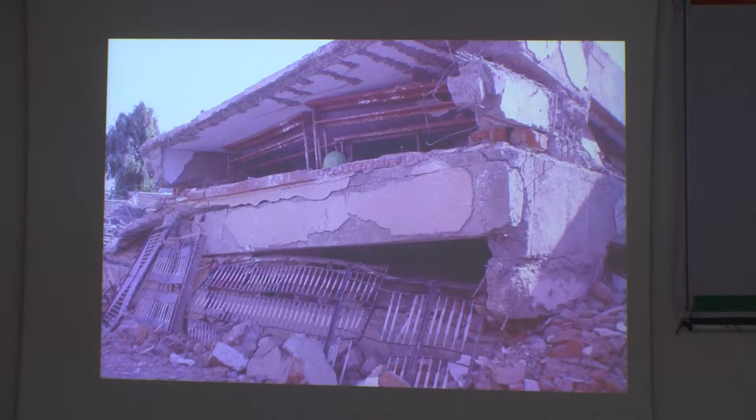So today I'm going back to Shanti Niketan. I want to send my children to Shanti Niketan. Under the trees I want them to learn, even if it is raining, because I don't trust these damn buildings anymore. I don't trust them.

Because some of our own brethren who are in the architecture and engineering community have not been doing their job right. They have not been doing their job right, and that is exactly what is worrying us most, that ethical standards have really dwindled down, and the starting slide that we saw today made a huge difference for us, because at the end of the day, when you go out of this room, the onus is actually on you and not on anybody else.

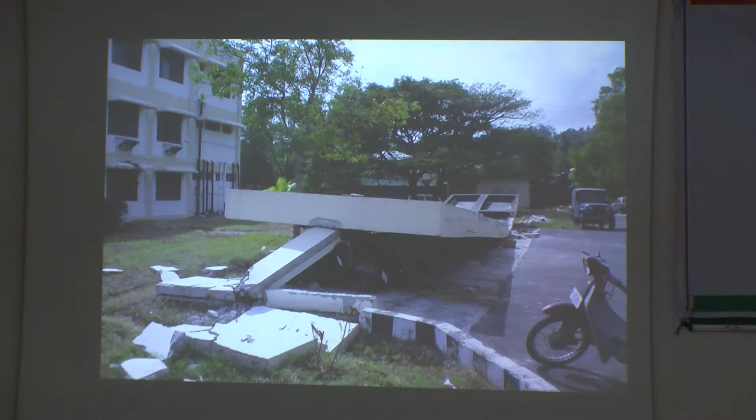The summary of what I would like to say is that today India does not have capacity to design even a cycle stand to withstand earthquakes. This is a cycle stand. Right? Cycle stand in Chopra Saab's book is the vertical, single vertical column. You can't get a structure cheaper than that in terms of structural elements.

That's the lowest. Of course, if you ask Saint Gobain, now Saint Gobain is building without any verticals, only horizontals are going to be there in Saint Gobain's new building that they have come up with a wonderful picture of. No verticals, only horizontals. Very interesting. They'll hang in the air. Newton's law will be applied floor-wise. Weights will just stop there. New gravities will begin.

The major concern is quality and safety. Two items that have been lost somewhere en route from college to practice. We have lost these two items on the way. When you reach home, your mother says, "Where is it that you put it in your pocket?" and you say, "I don't know what happened, but I lost those two, quality and safety."

Both in self-built houses and in contractor-driven houses, and the images you saw tell you that it's a deep problem. What is difficult is that the owners, who are typically non-technical, cannot make sure that a building actually has safety. The owners cannot make sure. They trust. When you sleep on the train at night, when you go from Hyderabad to Visakhapatnam, you have to cross so many bridges, especially the Godavari bridge. You trust the damn engineer that he has done the bridge right, otherwise you won't sleep.

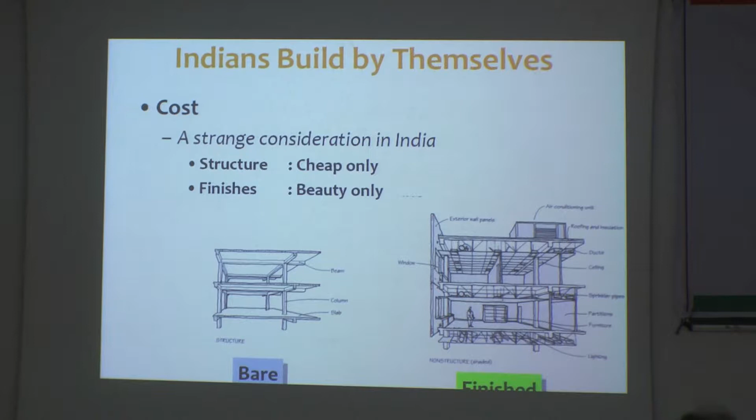The left hand side picture is what the engineer gives, and the right hand side picture is what the architect does to it. Let's take a closer look at that. The engineer gives you the left hand side picture, and the right hand side picture is what the architect is doing. Everything you want, false ceilings to finishes to furniture to equipment, everything.

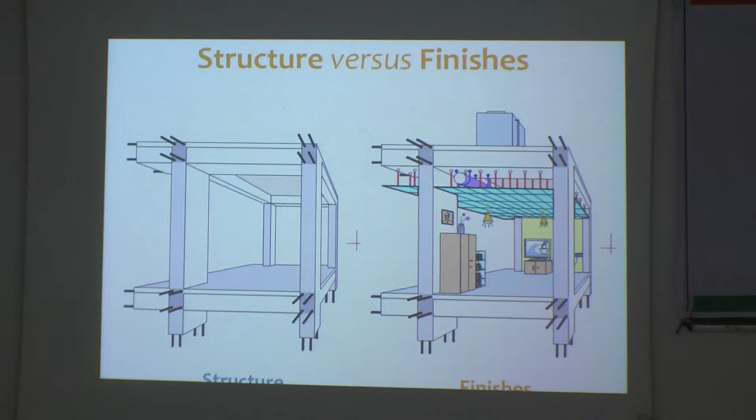And in recent times, you see a much varied version of this, which tells you that I want to make an extra buck, so I say, Airtel, please come put an antenna on top of my house and give me 3,000 rupees or 5,000 rupees every month, and that is what you're doing. An antenna is being put without ensuring that the building is actually going to be safe with the antenna on top of it. And many houses will not be able to withstand that.

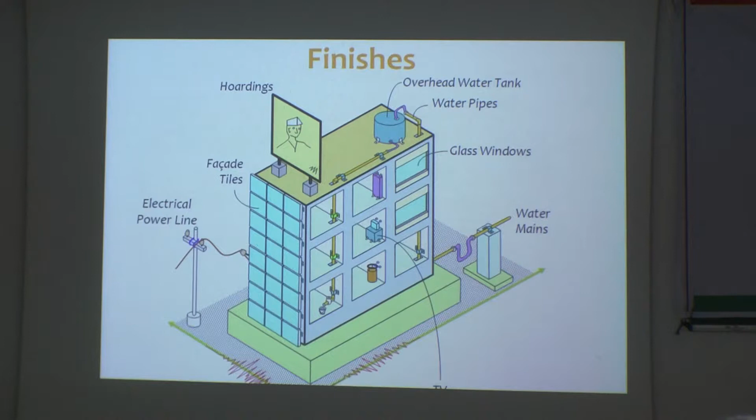And recently you saw one in Secunderabad just falling down because somebody put a ton of bricks on it to make halim on it, right? Yeah, it's embarrassing. You can't keep changing the functionality of the structure after it is built and approved by a municipality, then you're responsible for it.

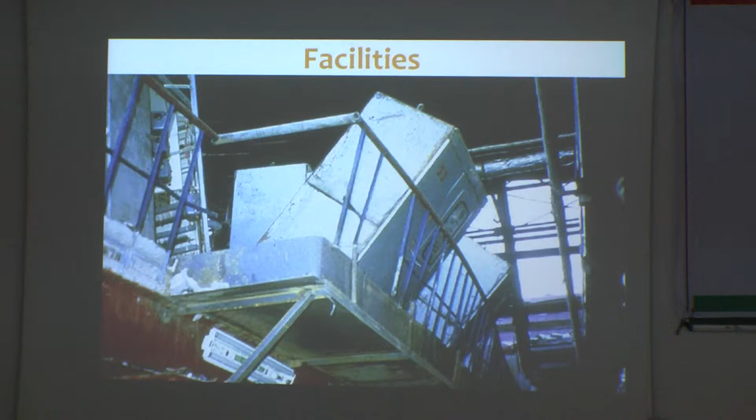Looks. That's the only thing left in this world. There are three things that the people of India like: beauty, beauty and beauty. That's the finishes, the facilities that you're talking about, and then the furnishings. All of them will be in trouble if your structure is not safe.

What is interesting is, I remember when we were looking at the India-Pakistan war that was going on, in our house we didn't have any color on the walls, possibly not even plaster. We were just about getting out from a lantern to a first light coming in, and then we had one switch and one fan on the top. That was the finish in the house. And today you have a whole load of them.

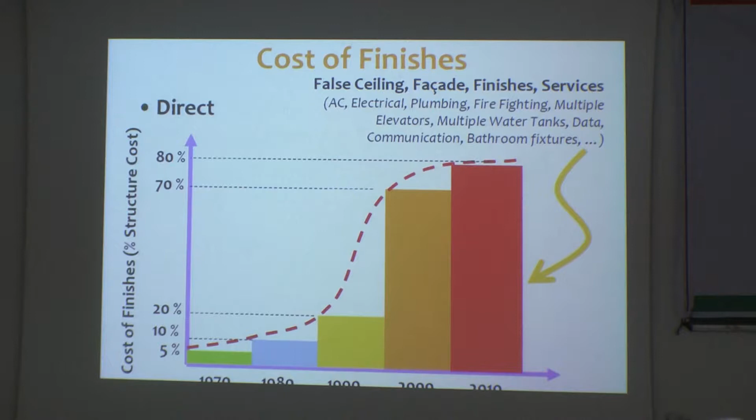And if you look at the cost, at that time the electrical work and all the finishes in the house was only about 5% of the total project cost. Today the tables are turned. We're talking almost 80 to 85% of the cost going to the finishings and fittings. So 15% of the cost is actually your structure, and you're skimping on that to make some savings, but you're not willing to sacrifice on your Jaquar faucets and plastic emulsion finishes on the walls. So somewhere we have misinformed the owners across the country about what is okay and what is not okay.

Now, typically, you're seeing 1.27 billion divided by 305 or 250 million houses. So 4 to 4.5 is the calculation. So everything looks okay; there's no shortage of housing. But there are a lot of rich people who own 3, 4, 5 houses, and so there are a lot of poor people who don't have any houses. The point to remember is, if you are getting more than one property in your name, you're actually getting somebody out of their house. Unless you have added 2, 3 houses for them, don't get one more for yourself.

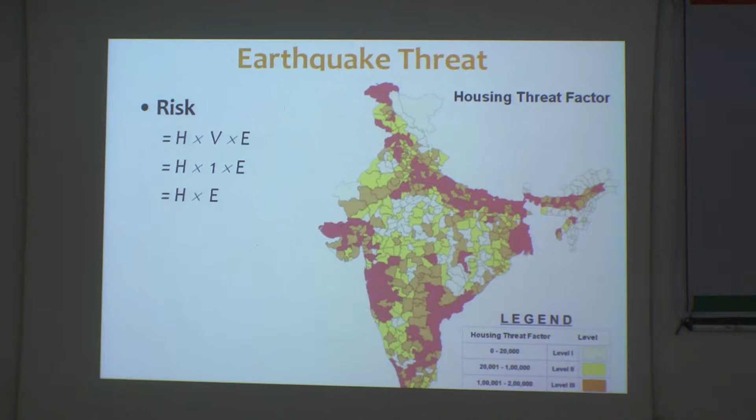The others are not free from this threat. This is the current understanding of hazard, the current threat picture; as the hazard picture changes, you will get a new threat perception. In the early 1900s, the world had loss of life and property, and so did India. Today, countries that took life as a priority have very little loss of life. Even if one person dies, they go crazy and want to get to the root of why that person had to die in a structural collapse.

But that's not the story in India. We just give ex gratia. Only the amount of ex gratia has been going up since my childhood. I remember something like 5,000 those days, and now it is 10, 15, 20 lakhs. The number is only going up. It's not made any difference to the nation.

States in India can be classified: first, those who know what to do and are doing it. Second, those who know what to do but do not do it. That's called willful misconduct, and these are the most dangerous states. And the third set don't know what to do and don't do anything about it. That is ignorance is bliss. But the middle one is actually the trouble for us.

What is important to note today is that every death in every house is avoidable. Only when engineers are accountable for safety can it be avoided. If engineers are not accountable for safety, they will never have this threat or pressure on them. And India needs to wake up its engineers and architects.

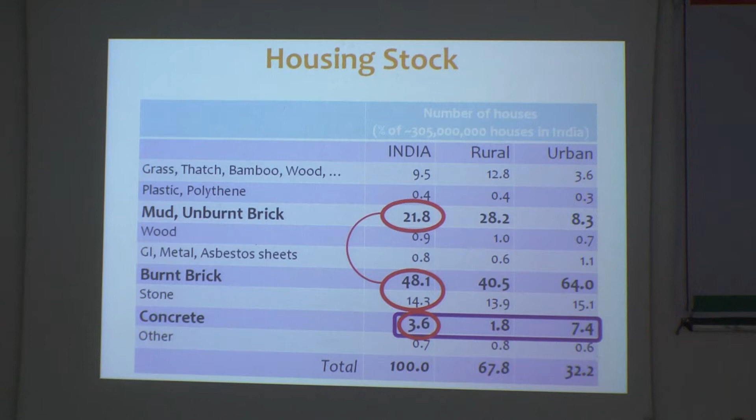And what did we do in the colleges? We left masonry to masons. No civil engineering program has masonry in it. Building construction as a course has little one line saying masonry, and that's it. Today, the number of faculty members who can teach masonry from the heart will be on the fingertips, 3, 4, 5 in this country. We have left it to the vultures. We have abandoned. The person who's supposed to throw light on the society has abandoned this responsibility. So this is not acceptable.

At the same time, reinforced concrete, even steel structures are not taught in the so-called urban curriculum that we have. Even steel structures are not taught properly. The number of faculty members who can teach steel again is on fingertips, again from the heart, not from the book. Vazirani, Ratwani, Punmia, Ramamrutham, Kanetkar, you know those books? 1 paragraph of theory, 40 pages of problems.

That one paragraph has a formula and 5 variables. In the remaining 40 pages, 4 variables are given, 1 variable has to be obtained. I mean, this is like disrespect of intellect on 40 pages. But we are doing it. We have abandoned steel, we have abandoned concrete, masonry. Only thing that's left is concrete here. Very unfortunate curriculum in civil engineering today. Architects are little better. They spend at least 2-3 weeks drawing English bond, Flemish bond and all that.

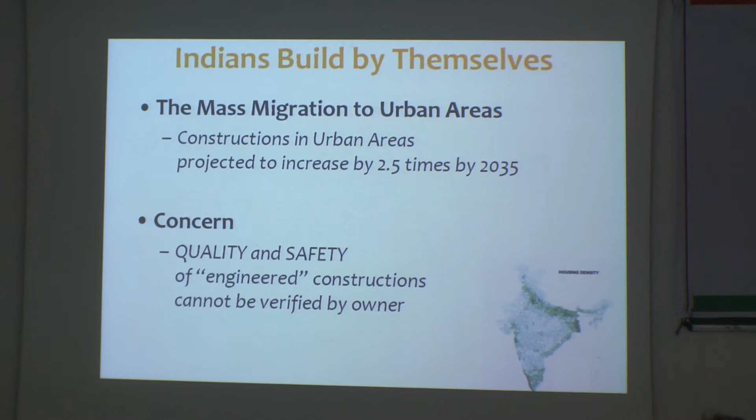The expectation is in the next 5 years, in this 12th five-year plan, we're going to spend 85 lakh crores. Those of you who don't know 85 lakh crores, 85 followed by 5 zeros, followed by 7 zeros. That is the number of rupees it has. So India is not a poor country, if anybody thought India is a poor country. Half of this money will be spent by civil engineers, 1/4 of this money by electrical and mechanical engineers, and the rest of the country will keep the remaining 1/4.

So this 25 million houses that we have to build, let's look at housing alone. For that we are spending 5,000 crores, let me say, in this next 5 years or 4 years left. And he's saying it's time up for me to go.

Every lady passing on the street is not your bride, and vice versa. Only one is determined for you, and that will come at the right time. Don't be in any hurry also. Don't waste your time in colleges. It will happen at the right time. Everything is determined.

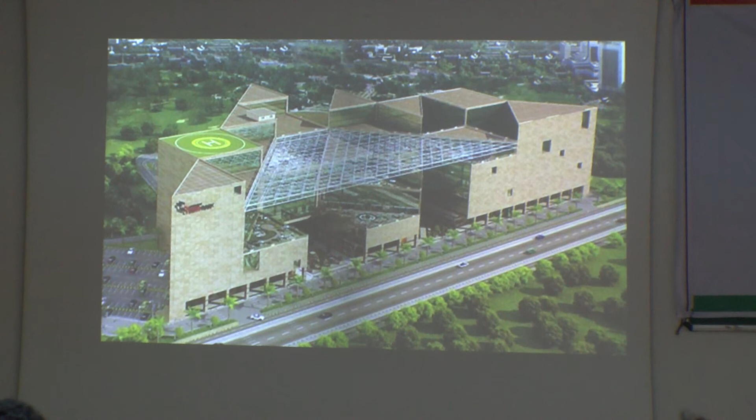This is another fellow who said, okay, sun is on this side, blank, no windows. Very good. What did he do in the ground storey? Take a look at the ground storey, open ground storey, with a helipad on the top. Quickest way to, right?

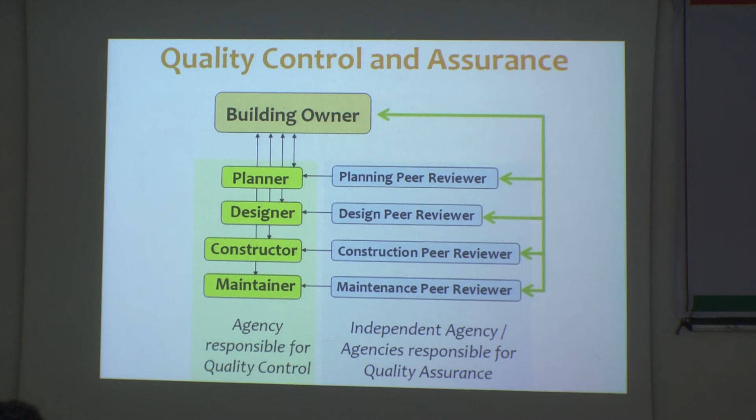What has happened is, I am designing a building, nobody is checking my design in this country. I am constructing a building, nobody is examining whether I am constructing properly. I am analyzing a structure, nobody is verifying my analysis. I am going scot-free. What it means is, even if I have got the best degree from any college and I have got good quality control in myself, nobody is assuring quality. Nobody is looking over my shoulder to make sure that I am doing good quality work. No quality assurance.

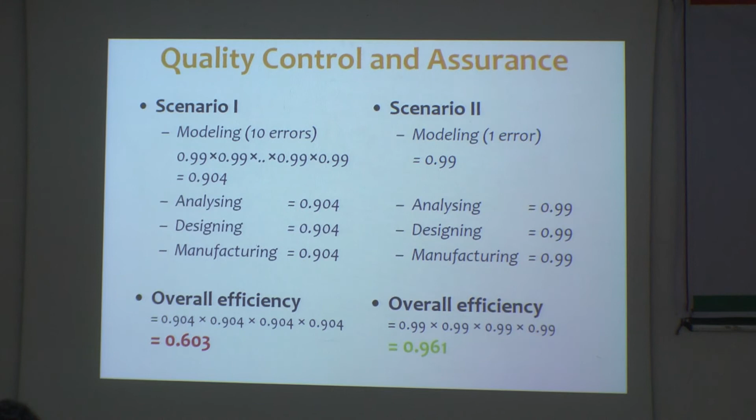Take a look at this example. If there are 10 steps in each of the 4 activities of modeling, analysis, design and construction, then even if I make one mistake, 99% efficient, in 10 steps I get 90% efficiency. In 4 of these acts, I will get 60% efficiency. But if I have a quality assurance company sitting on my head, I will make only 1 error instead of 10 errors, then my efficiency is 96%. Believe me, quality assurance is a very powerful activity if you take it seriously. You need to have quality assurance in building and housing safety.

Otherwise, you want to see pictures? More and more pictures. We will collect as many pictures as you want, and then you can keep wondering about it. And your curve is going to go steeper and steeper to the left. The life of the structure is going to come down faster and faster. And this is the truth of today's reinforced concrete construction. IIT Kanpur is built with reinforced concrete structures from 1960, they're still standing. But 15-year-old reinforced concrete structures are all corroded. This is the modern reinforced concrete that we are building. Not a good situation at academic or even professional level.

I think the finishing instinct, the last lap, we are not running properly. And we are always looking at somebody from the West coming like Santa Claus, giving gifts to us and going away. All the time. We are not trusting ourselves. So my question is, how long will you keep appreciating their excellence in product development, an outstanding stadium, great lighting work, or an excellent car and all that, and then abandon India?

This is what troubles me most: why is it that our roads are like that? Why is it we can't build our country? We need to look within. We need to understand this one word which that old man said and died: self-reliance. Okay, 67 years ago he said it, but still we are not understanding what he said. Self-reliance is the mantra for us, but it's not happening yet.

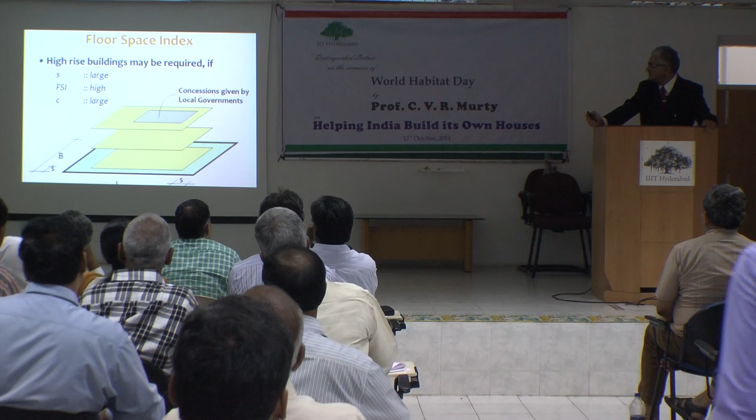The second story I want to talk about is this tall building story. Everyone knows floor space index. It depends on the plot area, the floor area, and how much setbacks you require. Everyone knows that. Fair enough. Understand this picture carefully. For housing the same number of people, depending on how you play with your setbacks and your ground coverage, you have to build taller and taller. So look at this, the same number of people can be housed in this building as well as in this building.

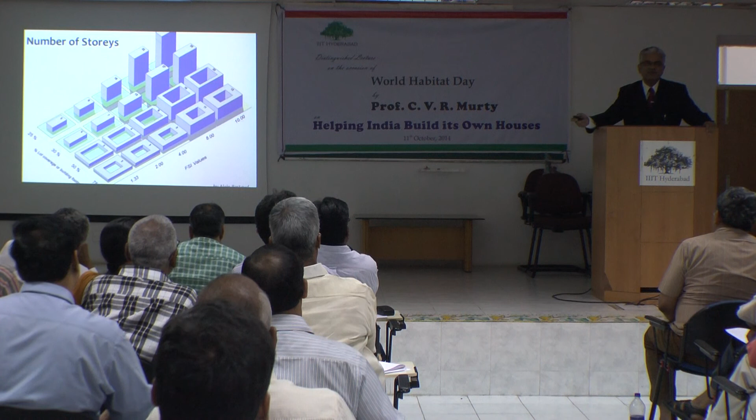That is the embarrassment. How is it that I have to build some 40 stories here and I can manage that with 2 stories only? Just because my governments here tell me that I can use 75% ground coverage and I need to do only 1.33 FSI. But if my governments tell me no, I have to go to higher and higher FSI and smaller ground coverage, then I'll kick up my story heights. Everybody knows as you go taller, you'll have all the troubles on the earth. Today it's become a fashion statement to go taller. It's not a requirement of the nation, nor of the city.